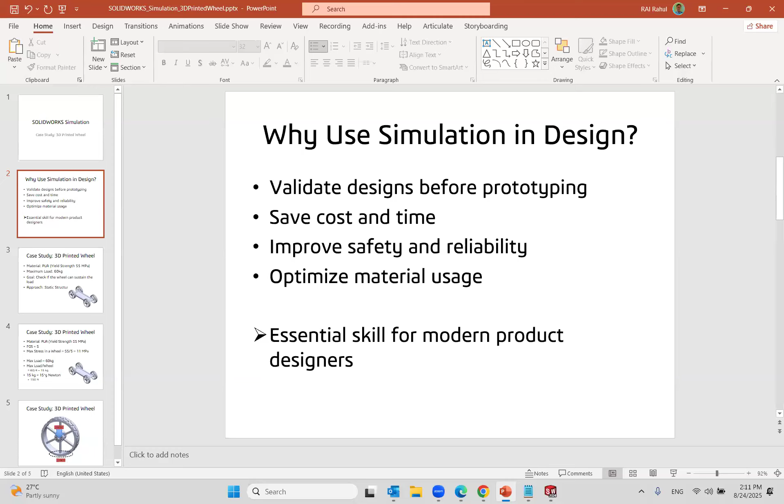So let's get started with this. Our case study will be of a 3D printed wheel. One of the common materials used for 3D printing is PLA, and its yield strength is 55 megapascal.

This is the key thing we need to verify in our design virtually: when we apply a load virtually on our 3D printed wheel, we make sure it does not exceed 55 megapascals. Because after yield strength, the product will fail and start to deform permanently. So we need to keep any stress induced in our virtual design less than 55 megapascals.

In simulation, we are going to simulate the real world, but we try to simplify it as much as possible, because if you simulate everything, like each molecule, the computational cost will be exponential. So we are not going too deep.

Our only working condition is that we are going to apply a 60 kg load vertically downward. In reality, there will be real factors—jerks, loads from other directions—but we are not considering those yet. For initial concept, we are just considering a maximum load of 60 kg downward.

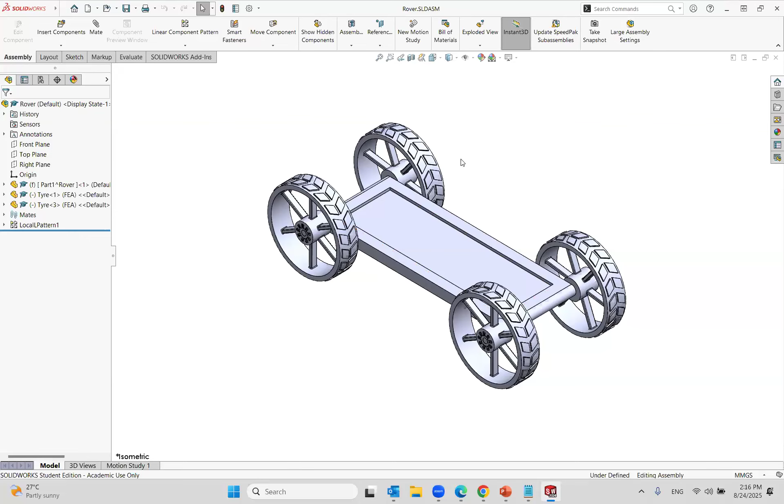So this is our assembly. As I mentioned, we are not going to simulate this whole assembly. We will just take one wheel and open this. So now this is our wheel.

There are too many things which are unnecessary for simulation, like these threads and engravings. We can remove these because for simulation, the stress generated at these points is not going to affect the performance of this wheel, so we will suppress these. This is our simplified geometry that we can use, and the stress generated in this part will give us an idea how our wheel is going to perform in real life.

So the first step is that any unnecessary decoration on your part, you need to simplify. Then you need to activate the SolidWorks simulation plugin.

For that, go to the options menu, and from there click on add-ins. Here you will have the SolidWorks simulation plugin. When you click this, it will activate in your present session. But if you want SolidWorks simulation to be active every time, you can activate this option so it always activates when you start up SolidWorks.

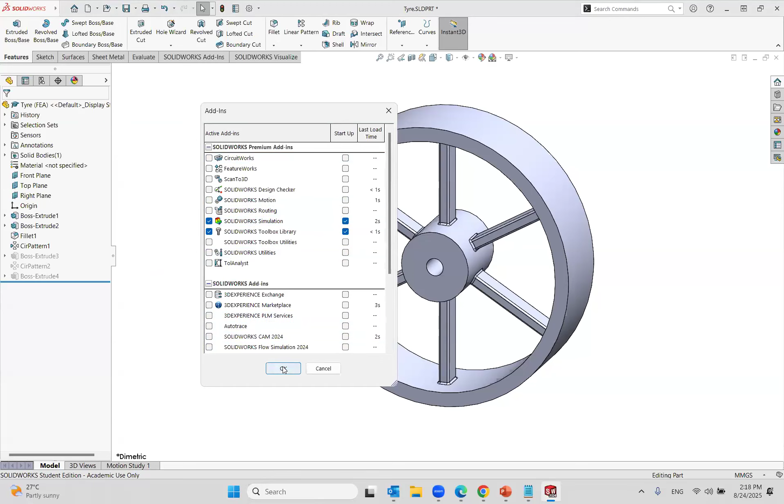When you click OK, you will see a new tab within a second. You can see this simulation tab. From the simulation tab, you now need to click on new study.

Here are a lot of options like thermal, buckling, fatigue, non-linear. First start with simple simulations like static simulation, and as you move forward in your design journey, you can perform other simulations also for buckling, fatigue, non-linear, drop test and others. For this webinar, I will just do a simple static study of the wheel.

Click OK and it will create a new tab of static study of wheel. So your 3D modeling tab is this model, and your simulation tab is static study of wheel.

Now we need to apply material to this wheel. As I mentioned, we will use PLA material. Go to your 3D model, right click on it, and there is an option for apply or edit material.

PLA material is here, but generally the PLA material is not available in the SolidWorks simulation material library. I will delete this and show you how you can create a new material in SolidWorks simulation. So create a custom library, or let's create a library in this.

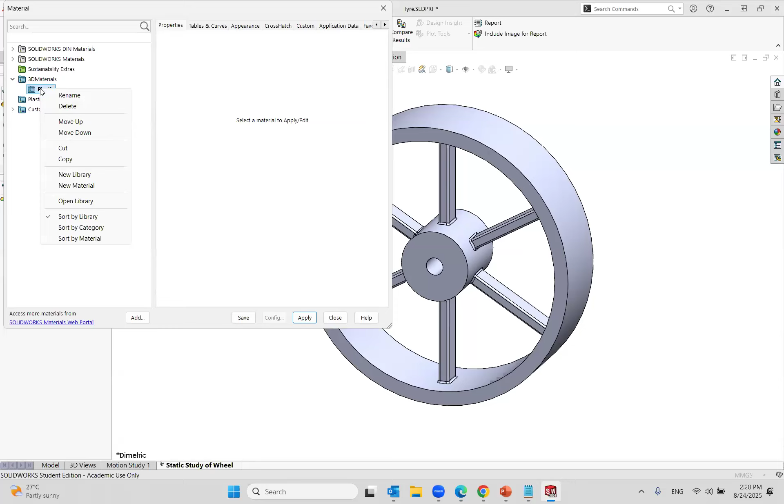In this one, now we will create a new material and name it PLA. From the website or wherever you are buying the PLA material, you can get these properties. The property for PLA is: its elastic modulus is 3500, its Poisson's ratio is 0.36, its mass density is 1250, its yield strength is 55, and its tensile strength is 60.

These red fields you must fill to perform any SolidWorks simulation, otherwise it will show an error. The blue ones are optional. Make sure you have all these four properties before applying the material. Now you have created the material, just click on apply, and you can see that this PLA material is applied to your part.

Now after applying the material, as I showed, we are going to fix the bottom part, but right now I will show you how you can fix something. You need to go to the fixture option, right click on it, and there is an option for fixed geometry. From this example animation, you can see how this fixed geometry is going to behave. There are other options too, for roller slider, and one for fixed hinge.

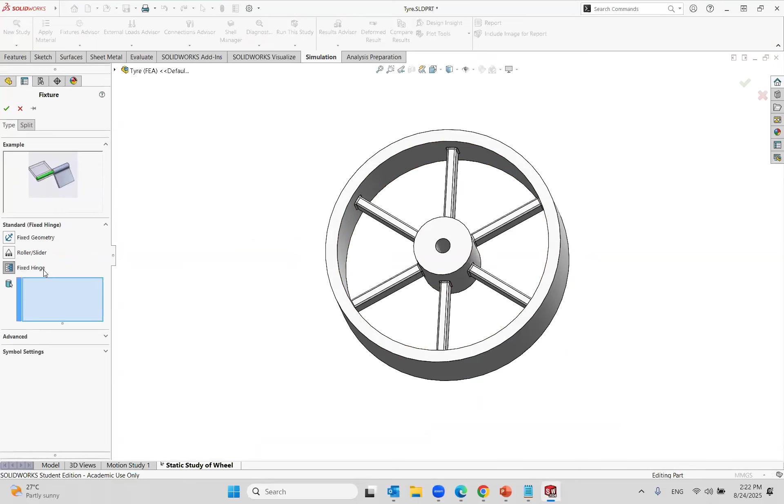But for now, we will use only the fixed geometry. Now I need to select a face. Right now it is fixing this complete outer surface of the wheel, but we do not want that - we want to just constrain the bottom part. So we need to split this outer surface so that we can apply a different boundary condition to a particular part. For that we need to go back to the model. I will simply create a sketch.

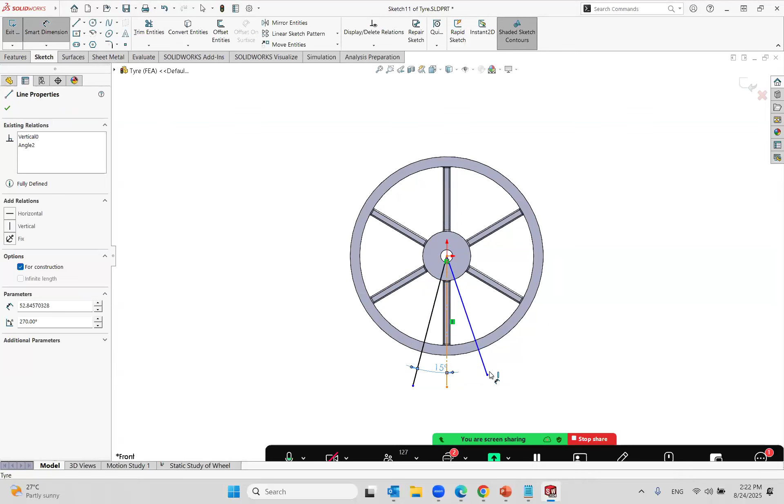I will make this as a construction line, and I will add dimensions to these lines. Now I will use these two lines to split the surface.

Go to Insert, from Curve select Split Line. This sketch is selected, if not you can select it from this flyout menu. Then for the surfaces, I will select this outer surface and click OK. Now you can see there are two partitions of the surface, this smaller one and this bigger one.

Now if we go to that static study of the wheel, go to the fixture option, select fixed geometry, and now select this bottom portion only. You can see these symbols demonstrate that this part is constrained. So now click OK. Now we have fixed the wheel, the bottom part of the wheel.

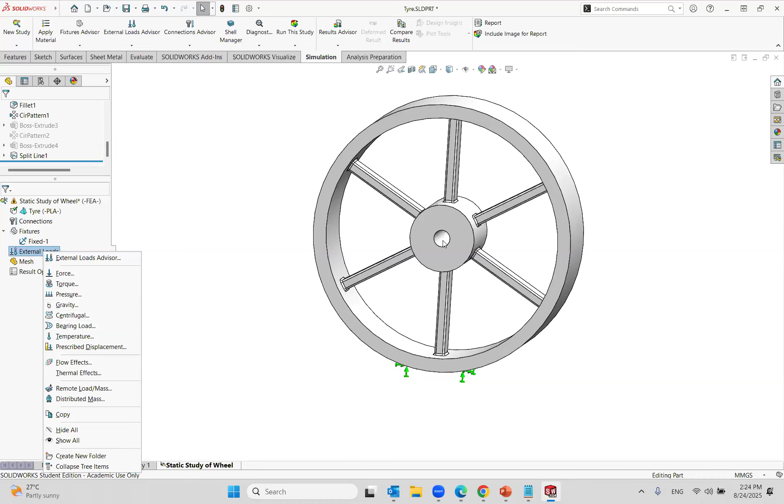Now we need to apply load to this board. We will use this external load options. There are force, torque, pressure, gravity, but for bearing loads, like here we are going to insert a metal pin or some other way to attach it to the rover, so bearing load is the perfect one for this condition. According to your application, your product, it will differ, but for this one, we need to apply this one.

But to apply the bearing load, first we need to create a coordinate system. As you can see, there is an option to select a coordinate system, so we will quickly create that. Go to the Feature option, from the Reference menu select Coordinate Systems. For the origin, we will select the part origin, and for XYZ we will keep it as default. Just click OK to create the coordinate system.

Now we can quickly apply the bearing load. For the surfaces, we will select this hole, and for coordinate system we will select the coordinate system we created. Now we will apply the load in the Y direction, so it will be 150 Newton. Let's click on the reverse direction.

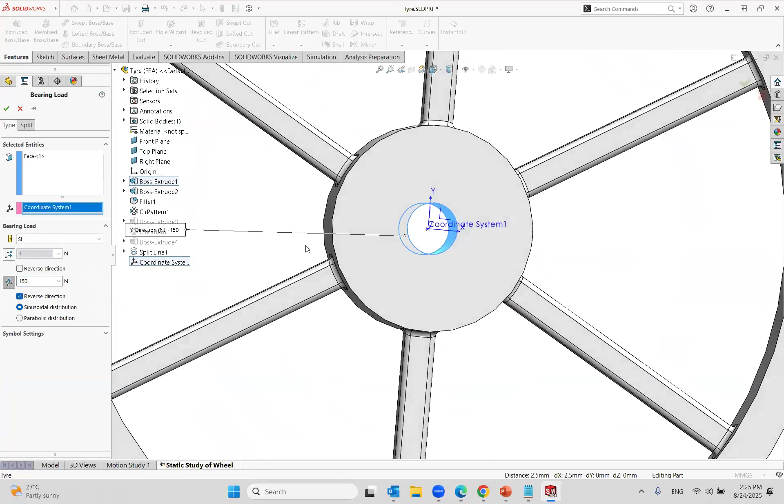And now click OK. So the difference between this bearing load and normal force is that in bearing load, it will have a sinusoidal distribution, which is more close to the real application.

So now we have applied a load, we have applied a boundary condition by fixing the bottom part, and we have also applied the material. So now comes the meshing.

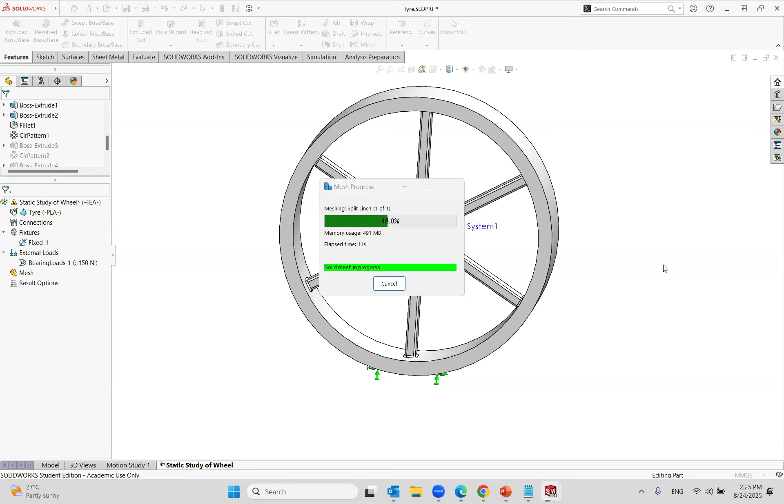So this mesh option, right click on it and just click on Create Mesh. We will use the default setting right now and just click OK. I'm using default setting so that I can show you live how it will create the mesh, and we are going to solve it live also. By using the default setting, it can be done quickly.

As you can see, the mesh is kind of refined at these joints, so we are going to use this mesh only. Suppose if you want to refine your mesh in a particular area, there are many options, there are mesh controls, so you can use those to create mesh at a particular area. I will share a learning path for SolidWorks simulation where you can learn that in depth. But for now, I think this mesh is quite fine.

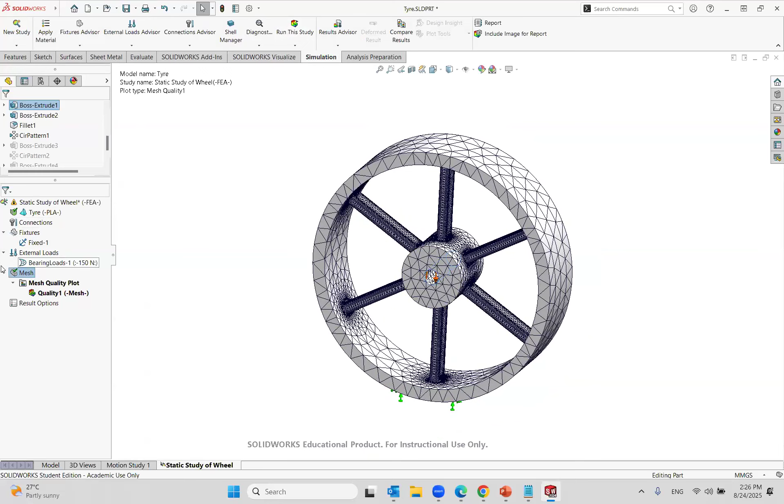So now let's run this study. After applying load, so first what we did, we applied the material, then we added boundary condition or fixtures, then we applied some load, then we meshed it. Now we can run the study.

So when you click on run this study, it will take some time and then it will start solving it. If your mesh is too refined, it can take longer time. Simulation is not just something you do once, you need to do it iteratively to understand how your model is performing.

So let's see. In the result section, we have stress, displacement, and strain. You can also get plots for other values, but for now let's just focus on stress. If we see the value, from this legend we can see that the maximum value is in Newton per meter square. So let's change it to megapascals. Right click on this and go to edit definition.

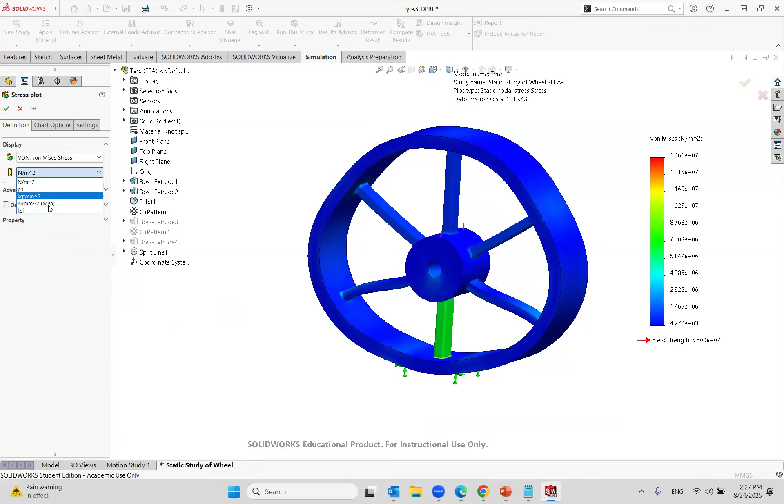And right now it is showing the deformed shape. Let's uncheck that, and instead of Newton per meter square, we will look at it in Newton per mm square, which is megapascals. And from the chart option, we can select to show the maximum value. Now let's click OK.

So here we can see that the maximum stress is almost 14.6 megapascals, and it is near this fillet section. And we want it to be less than 11 megapascal. So clearly 14 is more than 11.

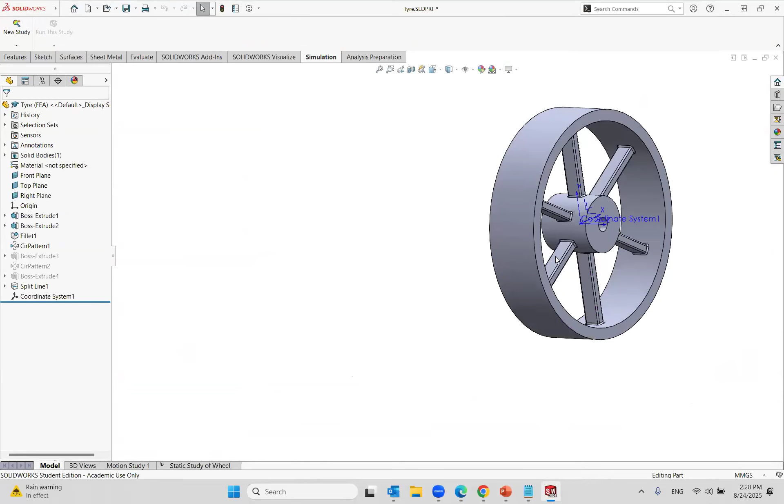So now we will do some design changes in this wheel, in this model tab, and then we will run the study again to see whether the design changes are reducing the stress or not. So we saw that the maximum stress was in the fillet section. Just click on the stress and then you can see.

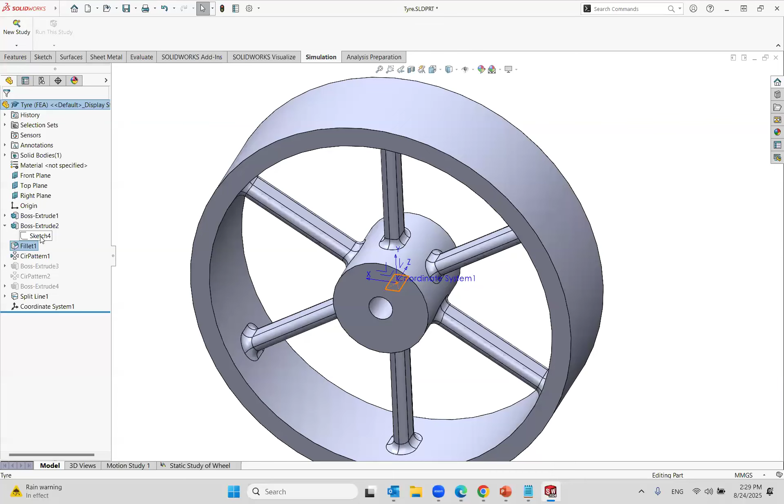So first, let's try to increase the fillet radius so that the stress concentration factor is removed. So we will make it 1.5, or let's just say 2... okay, so 1.5. And also let's increase the width of this spoke from 3 to 4.

We will rebuild this model, and now we just need to go to the static study and run it again. It will remesh the model and run the simulation study again, giving us new results. So earlier it created the mesh, and now the results.

So now the maximum stress is 8, which is less than 11. So with these changes, the maximum stress in the fillets is now around 8 megapascals, which is less than 11. So this is safe.

So now we can 3D print it and see how it is going to perform. And this is how you validate your product virtually.

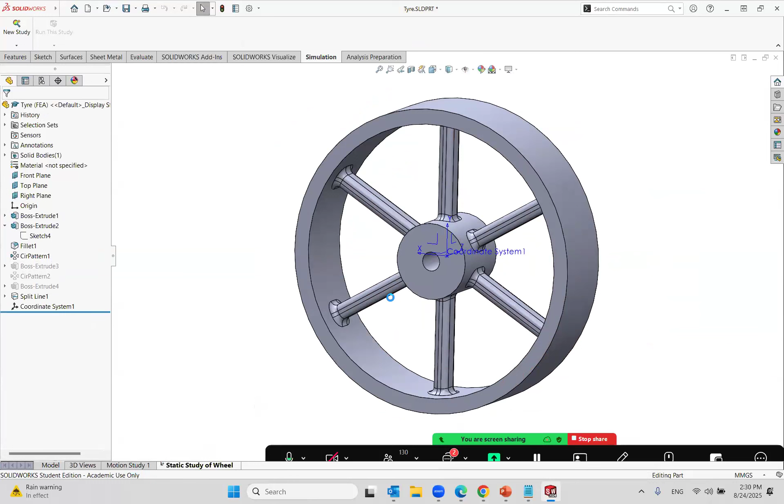So this is a simple demonstration, and this is the first iteration. One method I used was to increase the fillet radius. Other methods you can use include increasing the number of spokes, increasing the width or thickness of these spokes, or increasing the diameter of the rim.

By testing all of these variations, you can find out what design changes you need to make your product more stable or more lasting. So that was all from my side, and I will quickly share the link to the SolidWorks simulation learning path.

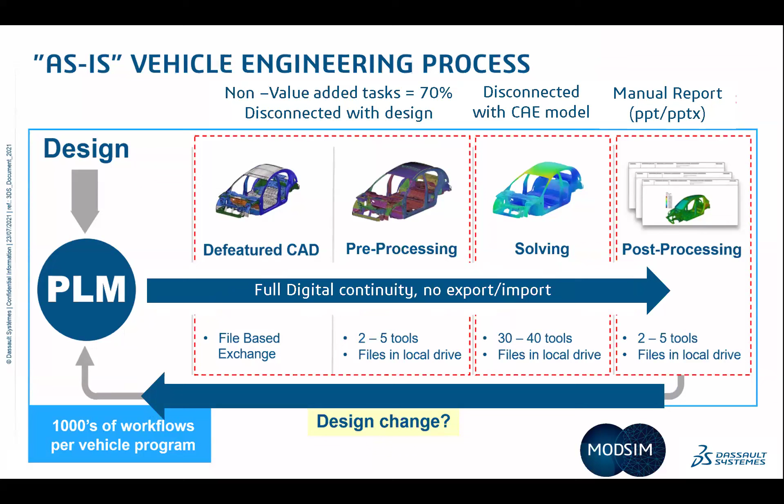All in all, the 3D Experience platform can help eliminate non-value added tasks like file storage, file transfers, and compatibility tests, and rather helps you focus on the more important parts of the design process.

Now let's get a simple introduction to the finite element method. In all disciplines of science and engineering, the focus is on determining what will happen when a physical system of interest, like a building, a bridge, or an aircraft, even a collection of molecules or a living organism, is subjected to effects of the environment, which may lead to a response from the system, or physical processes of systems of matter, or changes that happen to a piece of matter that we isolate, due to interaction of that piece with its surroundings, or any physical process that can be described mathematically, meaning we can formulate mathematical expressions describing the process and allowing us to determine how it takes place in space and time.

So FEA works by dividing the object into smaller, simpler pieces depending on the object's geometry. Finite element is basically dividing a big part into smaller chunks. These elements can be triangles, squares, or any other shape depending on the object's geometry. By breaking down the complex object into smaller pieces, it becomes easier to analyze the behavior of each piece and how they interact with each other.

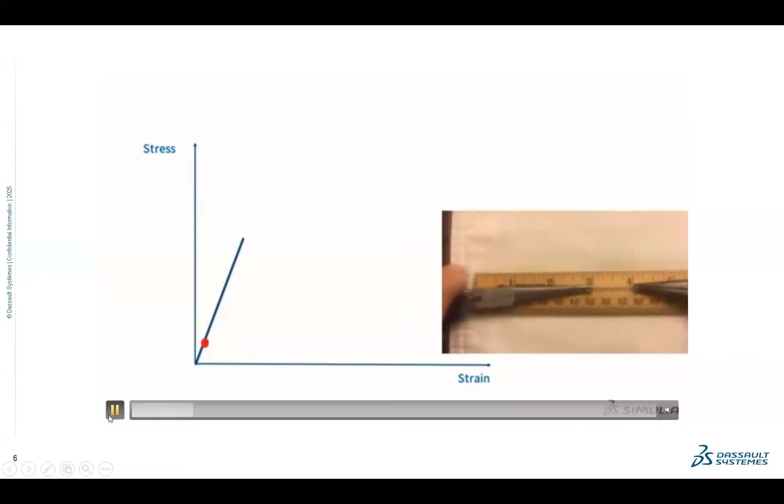Okay, now to understand the behavior of metallic components under load, let's understand the concept of a metal under load. So here you can see a spring.

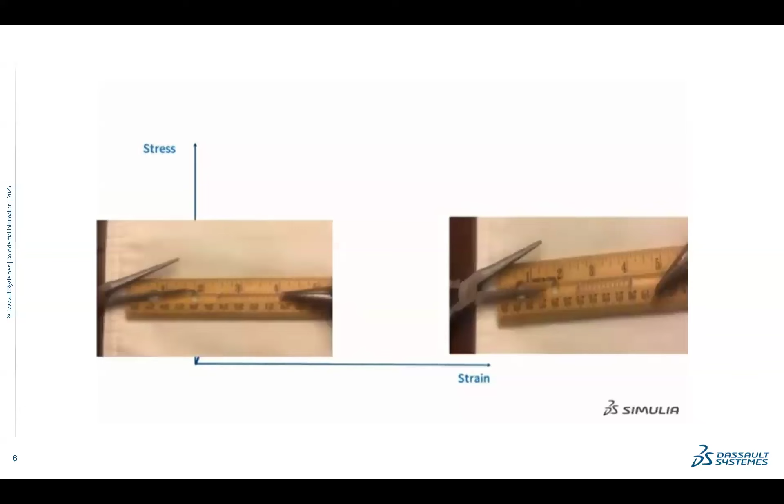When the spring is pulled within the yield point, the stress and strain return to zero as the spring takes back its original shape once the load is released. When the load is continuously applied like so, the relationship between stress and strain stops being linear, and when the load is released, the strain remains constant while the stress becomes zero. This is what Rahul discussed earlier - this is called plasticity. You apply the load, and after a certain point, the spring doesn't actually return to its original shape. These are called plastic deformations.

Okay, so now let us review a very basic ModSim workflow. We'll dive into the 3D Experience platform's native app of CATIA Part Design.

Shubham, is there a way you can stop the interactions right now? Because I'm constantly getting messages of hands being raised, so I'm getting a pop-up on my screen. Is there a way you can stop that? For hands being raised, no, Deba, I think it will be coming automatically. Okay, yeah, okay.

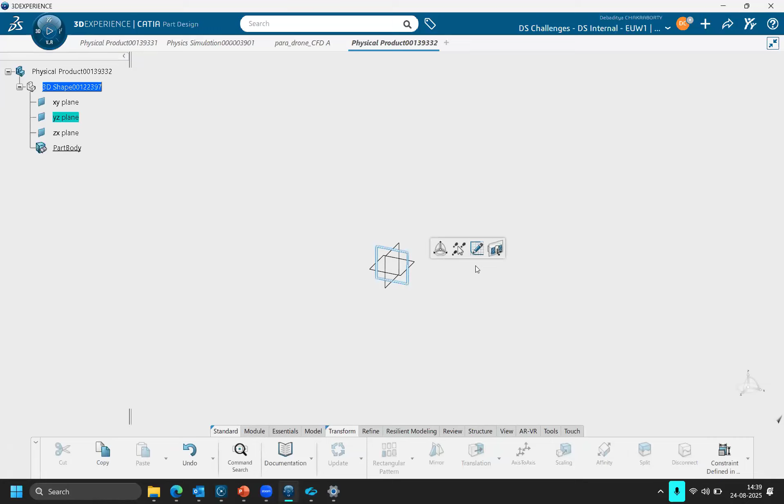Okay, so I think most of you would be familiar with the 3D Experience platform if you've attended all the webinars by now. So let's get started with a simple sketch. We'll simulate a basic cantilever beam here. I'll select a plane and start sketching, and make a centered rectangle, maybe 100 by 100.

Okay, so now we have some new functionalities that you can see. You can either constrain it yourself, like so. And I can see that my sketch is not fully defined, and I can be lazy and just let AI handle it for me - generative constraints. As you can see, in a snap of a finger, you can convert your sketch into a fully defined state. And I can use these constraints as parameters if I want to go for maybe a design of experiments, which we'll discuss later.

As Rahul mentioned earlier, any design process is iterative. If you want to automate the iterative design process with predefined algorithms, there is an option on the 3D Experience platform now within Physics Results Explorer, where you can set up experiments, design of experiments with classical processes like Latin hypercube methods for varying your variables, or maybe you can even go for machine learning based methods. We can discuss them later, but for now let's keep it simple.

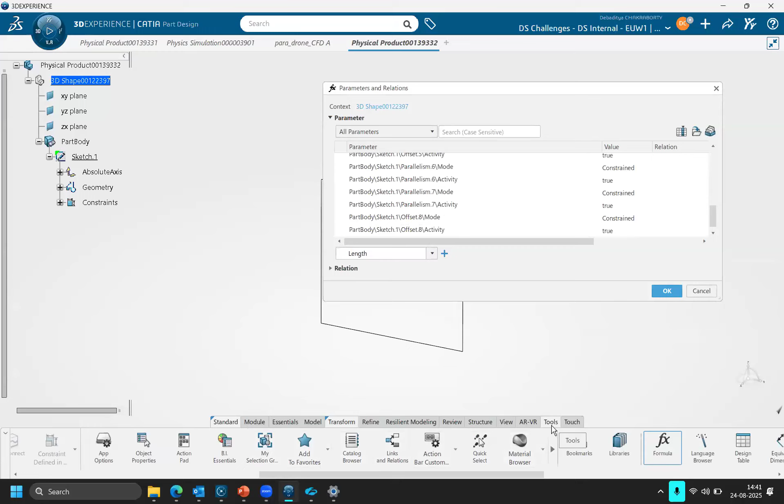I'll exit the app and start giving out the formula or the parameters. So here I'll start by first creating a parameter. From the action bar, I go to the tools tab and click on formula, click on plus, double click, and change the name. I'll just keep it as length for now.

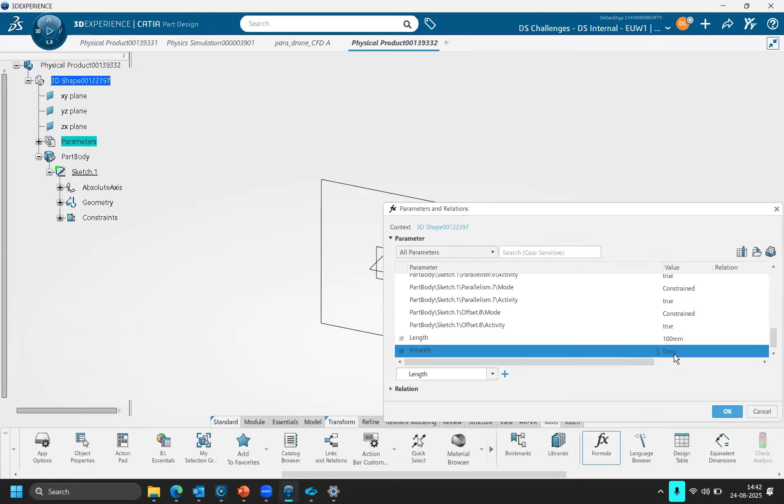Since I don't want to snap it back to 0, I'll just put 100 so that I can define, or give the details of this parameter to the constraints that we defined earlier. I click OK. Similarly, I can create another parameter called breadth.

Okay, so now at this point, what I'll do is I'll click on formula again, and now I'll assign these parameters to the constraints that we created. I just clicked on the sketch, and you'll see that all the constraints popped up. So I'll click on one of these constraints, the length.

Now I'll click on the three dots to edit the formula, and from the feature tree, I'll expand parameters. I'll double click. Okay, so I see we have one relation that has been created.

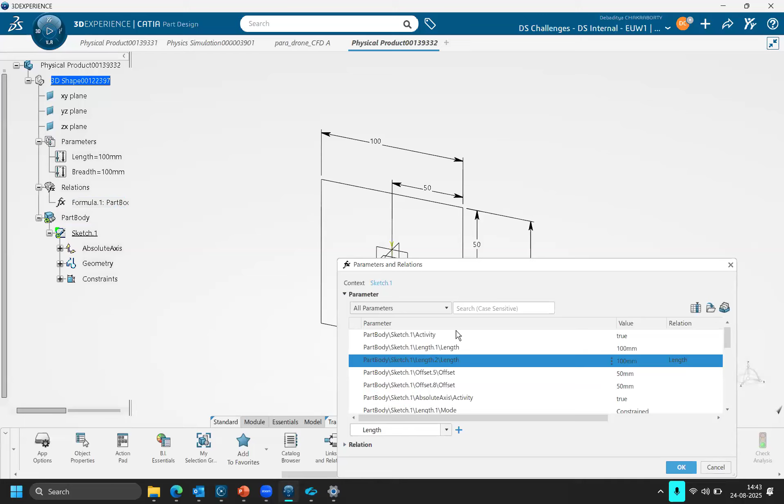Similarly, I'll do the same for breadth. Three dots, edit formula, breadth, double click. Okay, so now if I go back into the sketch, you will see an f of x kind of symbol right next to the constraint. That means these constraints have relations that can be manipulated right from the feature tree.

Okay, so now let's extrude this, or pad this, maybe 1000, looks fine. Now I'll change the parameters and check if the parameters are working. Looks like they are, so we're good to go for this simulation.

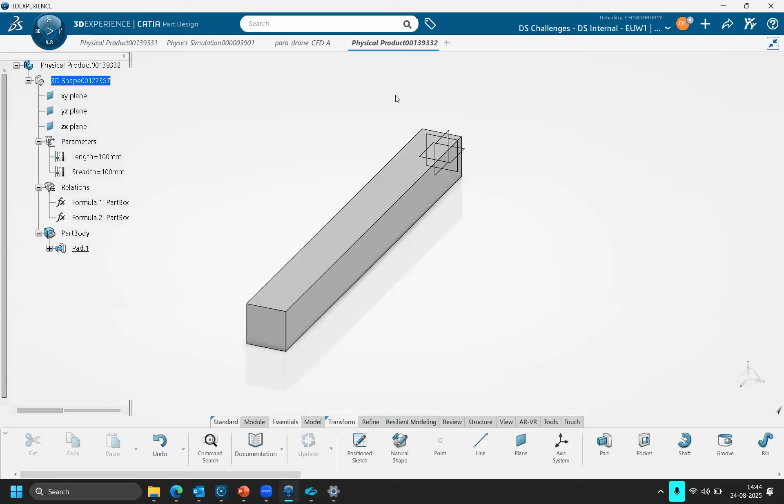Now at this point, you need to determine what kind of simulation you want to do. In the 3D Experience platform, the best part is you can access all the features of Abaqus, an industry-leading FEA software used by all the top companies in aerospace and defense, transportation and mobility, and high tech. You get all the features of Abaqus, which is mostly a developer-focused FEA software, into a very user-friendly GUI here on the 3D Experience platform, and you get the same results you'd get on Abaqus CAE right here with a much friendlier user interface.

So I'll just name it cantilever. I'll put the analysis type as structural. We don't have a finite element model yet, so we can't select anything. And I click OK.

Now, the best part about the 3D Experience platform is that you have an assistant. You also have a simulation wizard on SolidWorks that functions similar to the assistant. If you just keep following the assistant here, you can be guided through the full setup of your simulation, or the pre-processing, as we call it in the industry.

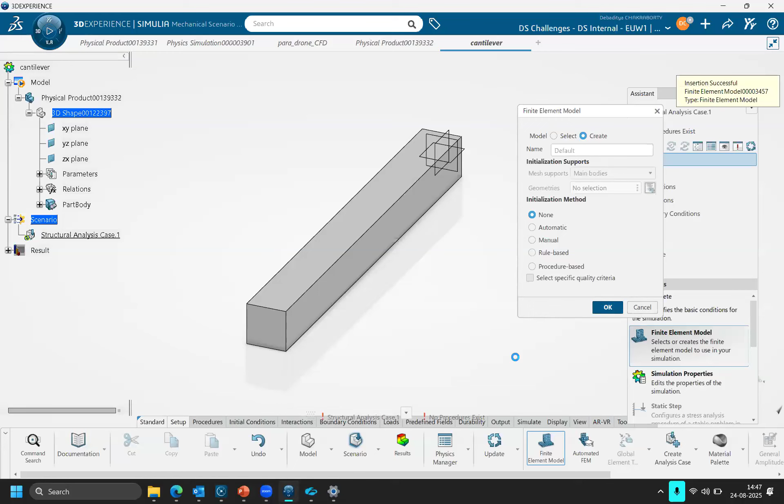Okay, so I see a FEM module has been added to my product structure tree. Next, I'll go to the mesh tab and search for the kind of mesh I want. I want a hex mesh, so either you can go for a sweep 3D mesh, or you can go for a hex-dominant mesh.

So for the support, I'll select this geometry. Now I kind of know what the dimensions of my beam are, so according to it, I can refine the size of the mesh.

The smaller the size of your elements are, the more time it takes for computation, because we are solving partial differential equations here, and they don't converge to zero, so it takes a lot of time to solve. I won't get into the mathematical part of it.

I just want all of you beginners to get a flavor of ModSim, of how you can leverage ModSim and basically sweep through your workflows quickly. So for maximum size, maybe we can keep 50.

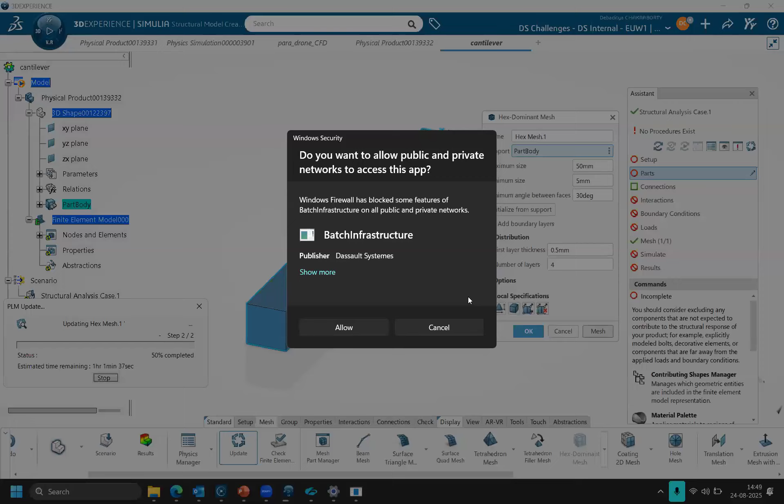Minimum size is 5. I don't think this 5 will influence anything here because it has a square geometry, so it shouldn't be a big deal, because we also don't have complex contours in our geometry that can influence the size of the mesh or the elements that have been taken.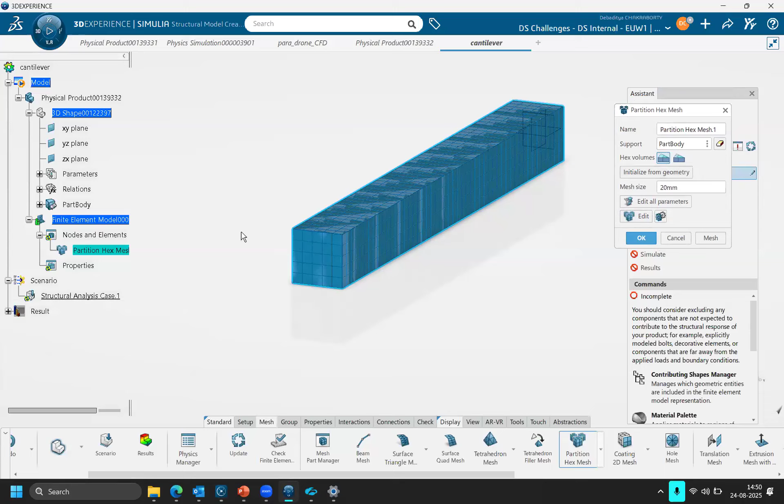So I see that we have a really coarse mesh here. You can go ahead and even change the size of the mesh. So maybe if I put 20 here, and I know that the dimensions I took are multiples of 20, we can get a very nice clean mesh here.

Next, whenever you are working with simulation, the finite element models or FE related apps, you need to make sure that you have a basic understanding of how Abaqus simulations work. That will come in really handy if you want real world correlations.

And like in Abaqus, you need to give it a section property. So here we have a solid section. I'll either click on the geometry here, or maybe I can click on the mesh as well.

Now I will assign the material. We have some predefined materials that are standardized, so if I go to DS Standard, click on the dropdown here, and click on DVI Steel, click OK.

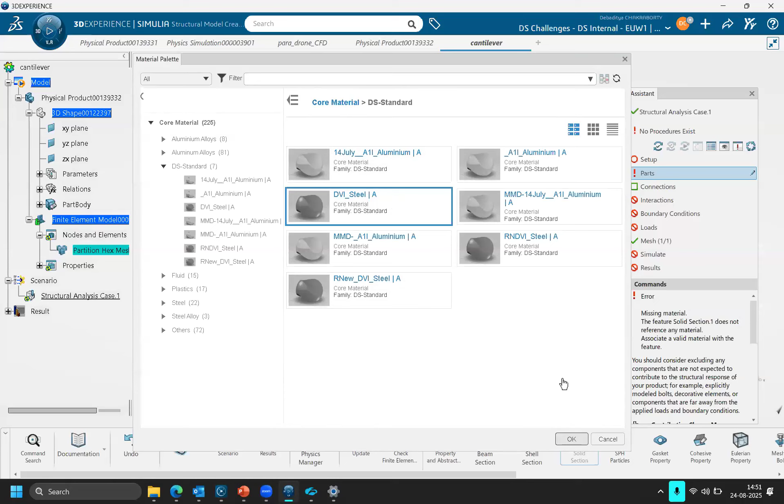Now we have this dropdown that makes us select the behavior of the material. Here we are doing a structural simulation, so we need an elastic plastic behavior. So I click on OK.

As I can see in the assistant, I think we are good to go into the scenario tab now. The scenario tab is where you'll actually start by defining what kind of procedure you want. Here you can see you have a whole array of procedures - the static step, you can get a little introduction of what this step actually is.

So like we did earlier, the static step will actually consider the plastic behavior of the material, and you can also solve it using static perturbation step, which keeps the model linear, so it won't give you plastic deformations. So with static step you can actually calculate for plastic deformations, but static step is computationally more expensive than static perturbation step.

Then you also have implicit and explicit dynamics. Implicit dynamics are used for low speed events, kind of like when you do quasi-static analysis of rubber gaskets, or high strain bearing products - like rubber gaskets or rubber mounts, or something that deforms in all the axes when any force is applied on them.

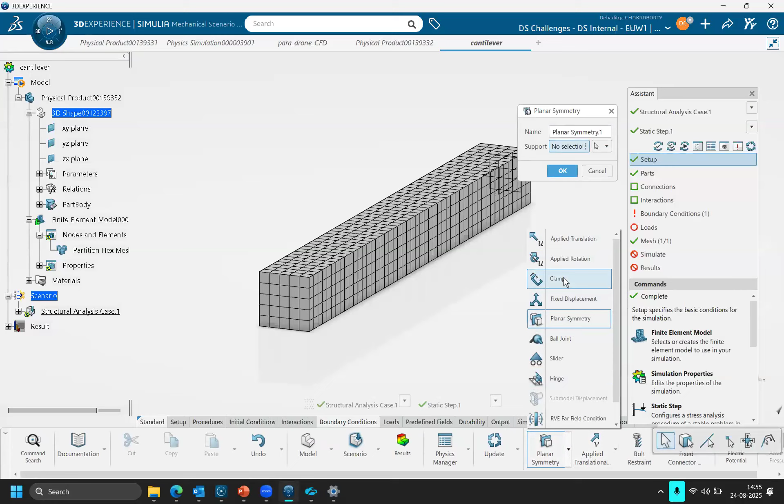Next, I'll go to boundary conditions. Here you can either go for fixed displacement, or you can also go for a clamp. I want to keep everything simple today, so I'll just use a clamp on the rear face of the cantilever beam. Click on OK. So when I select clamp, it means that all the degrees of freedom have been locked for this face.

So now I'll rotate it back again and go to loads. I can again click here on the assistant, and it will give me all the frequently used forces, or loads.

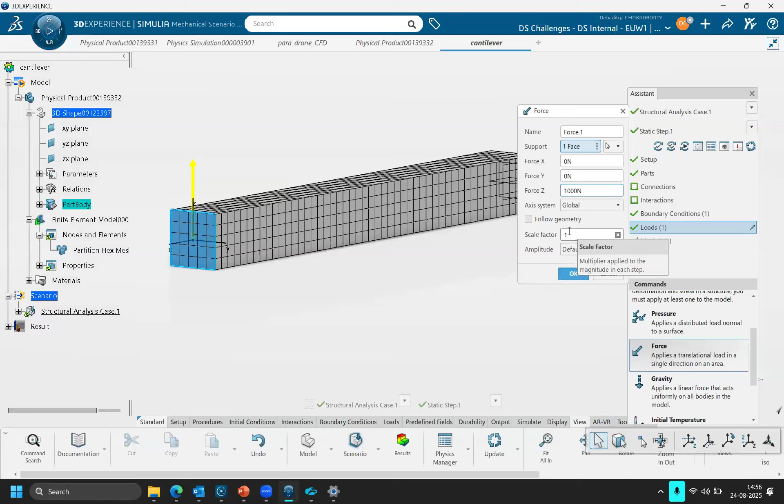So I'll just put a force here, maybe through the z-axis, 1000 Newton. I see that the direction is not where I want it to be, so I'll put it in the opposite one and click OK.

And I see that the system is saying that we are ready for simulation. So I click on simulate from either here, or maybe, before we hit simulate, I think it's a good opportunity for us to introduce outputs.

By default, when you're setting up a simulation based on the loads and on the conditions, there are some standardized output requests that are made ready for you. So it covers the most information that a basic simulation needs, or can output.

But if you want to go into the nitty gritty and maybe get total plastic strains and a maximum equivalent plastic strain, I can create special output requests and rename them to, maybe, P underscore strain. Click on OK. And here you'll see a drop down called output group.

So what are field and what are history output? This is again a very Abaqus solver based question. So what is a field output request?

Think of a field output request as taking a detailed photograph of your entire model, or a significant portion of it, at specific moments in time. Specific moment in time is the emphasis of this statement, and it captures the spatial distribution of a variable across a wide area.

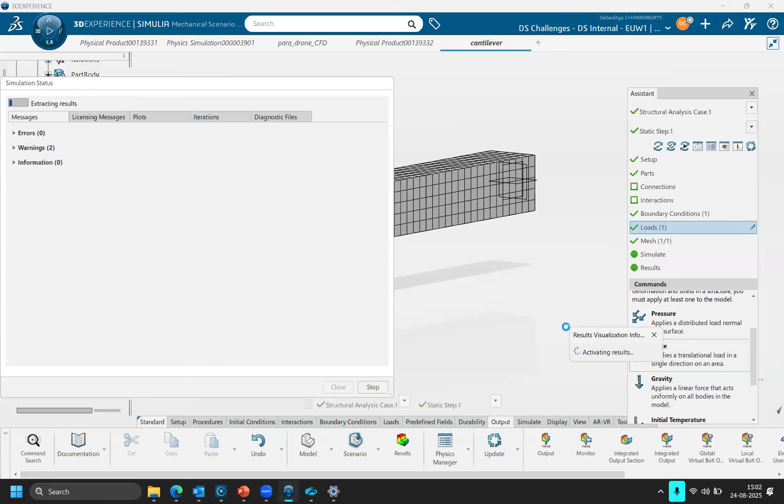All right, so now we get right into the Physics Results Explorer. This is where we'll post process our simulation. So we first get greeted by this dialog box.

Now here you'll see a drop down, first step. In this analysis case, we only have one step, so we need not bother with this. Rather, we should explore what all contour plots we got.

So first, let's go for deformation. Deformation was so small it didn't actually yield anything. So rather, we should actually go for displacement. So displacement, as you can see, is 0.195.

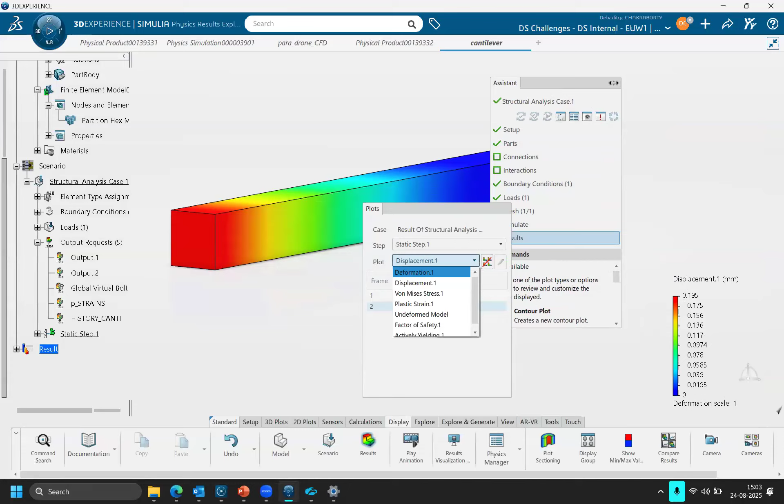Next one is stress, and I think the plastic strain that we requested earlier. Again, the deformation, the strains are so less that we don't even get into the realm of plastic deformations. Rather, we should also go to factor of safety, which is way over 2. So the plot looks like this. If it were failing, then definitely you would have gotten a color that would be in this spectrum or this legend, and nothing's actually actively yielding. So yeah, we need not bother this.

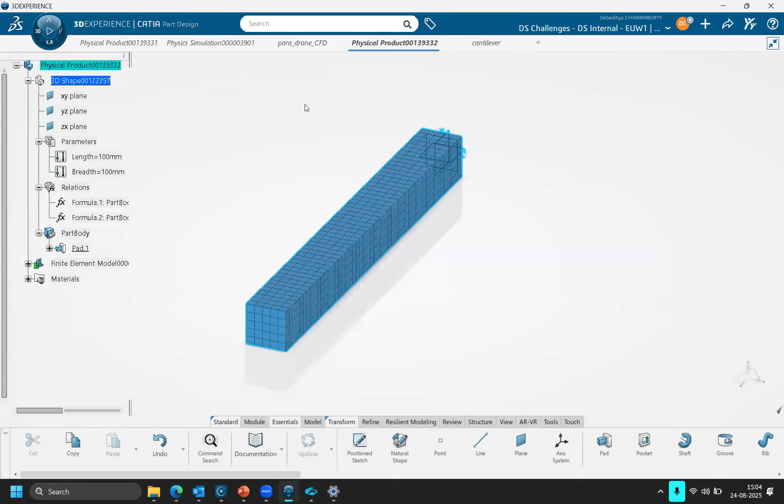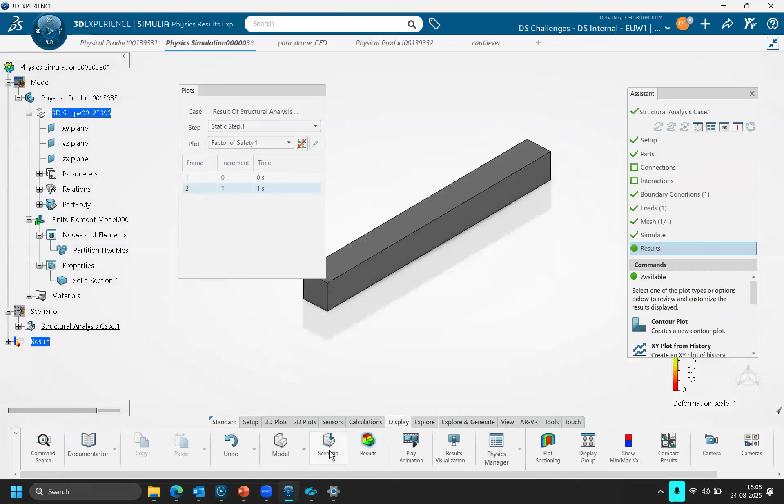And I'll go back here, this scenario. As you can see, the model has already updated with our new dimensions. But the results aren't.

Okay, so let's update this. So my bad, I opened a different tab. So I just updated it, and you can see that the model is now updated with the new parameters, or the changed parameters, I should say. And now maybe I'll summon the assistant. As you can see, we already have the CATIA update logo near the results. That means the results are not up to date and we need to solve again.

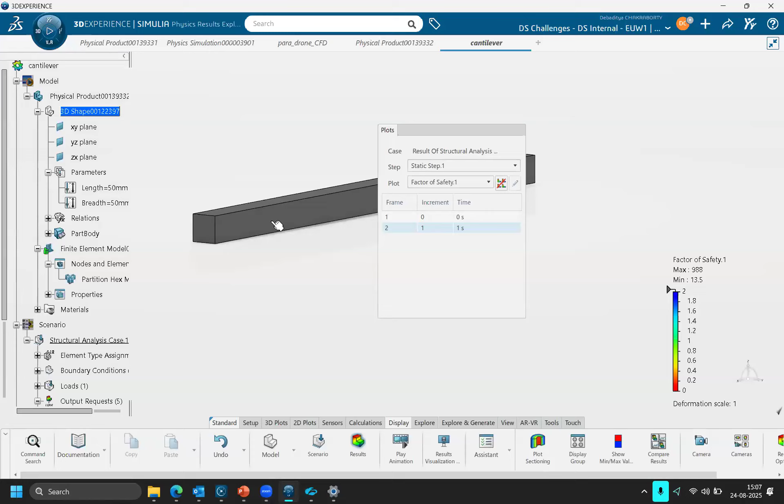And I think we are still way off from actually getting this beam to yield. But again, you can now notice that the displacement has increased a lot. You can say the same for the von Mises stresses. And we didn't enter the realm of plastic strains for this model. But if I increase the force exponentially, then definitely it's going to yield.

So now you can also go ahead and view different contour plots and play the animation like so. And again, the scale has been set to 1, so it is actually deforming exactly like it would in real life. But again, you can play around with it.

And this completes our Modsim loop. So we saw that our model has a factor of safety that is way beyond what we require. So we shrunk the model, we changed the dimensions using parameters, and we solved it again with just a few clicks. I didn't have to set up the model again from scratch. So with a few clicks and a few updates, we could get our new model all set up and running. So this is basically the essence of Modsim.

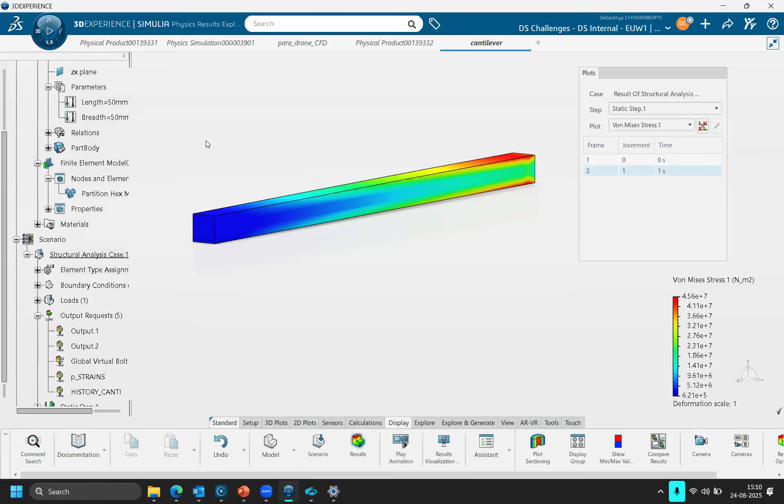Now we discussed a structural simulation example. Now let's get into a CFD simulation or a CFD application, and that is also in the same app, so you don't have to jump around in different apps. Let me just close all the tabs that I won't be needing from this point. Okay, so now setting up a CFD simulation takes time, but again, guess what? 3DExperience platform has such easy to understand workflows and such an easy to understand graphical user interface that you can get up and running with CFD simulations really quickly.

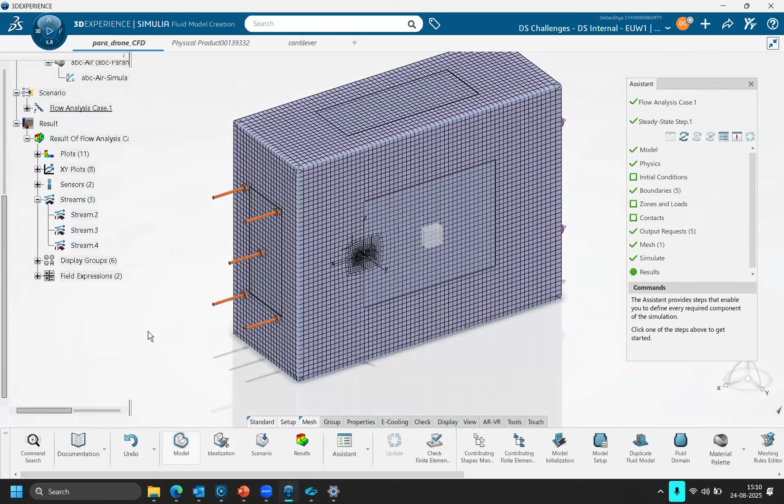Okay, so let us get started with one. So here, as you can see that we have a drone here. Okay, so I'll hide it and do a bit of visualization. Yeah, so we have a drone here. So I'll quickly tell you what all we are going to simulate this drone's aerodynamics for, what all KPIs we can use to evaluate the performance of this drone at cruising speed.

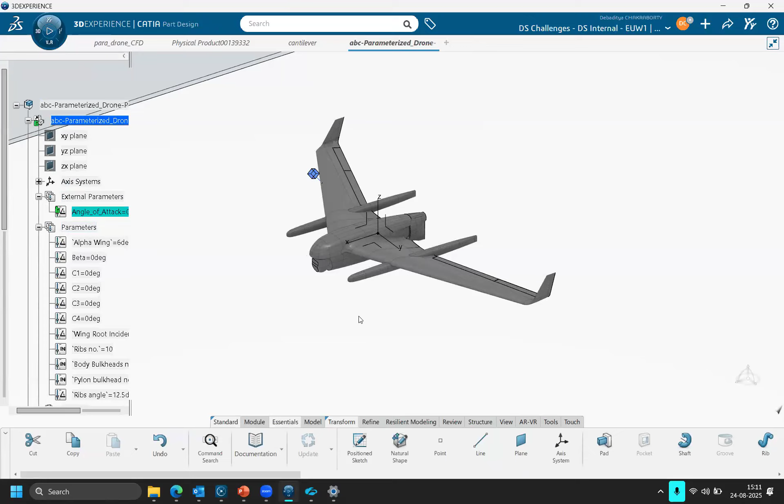So now as you can see that even the orientation of this drone can be parameterized. So the angle of attack here can be used as a parameter. So right now it's 0. But if I go to assembly design and change the angle of attack, you can actually calculate for ascent, descent, and cruise.

Now let's just head back to the PPT. Here you can see the basic workflow that we are going to use. We start with geometry idealization. We won't be discussing geometry idealization because again, it will take a lot of time and the whole workflow is available in the documentation. So if you want to get deep into it, I'll share a link at the end of the webinar.

Then we'll head on to fluid scenario creation, where we'll pre-process the simulation and then define the physics domains, apply the boundary conditions, customize the mesh, request measurements, the output requests basically, and we can preview the mesh. Again, this step is optional. And we run the simulation and post-process in Physics Results Explorer.

So the model used in this example represents a UAV, simplified to a drone. You can also call it a drone. You'll evaluate the aerodynamic performance of the drone model at the conceptual design stage.

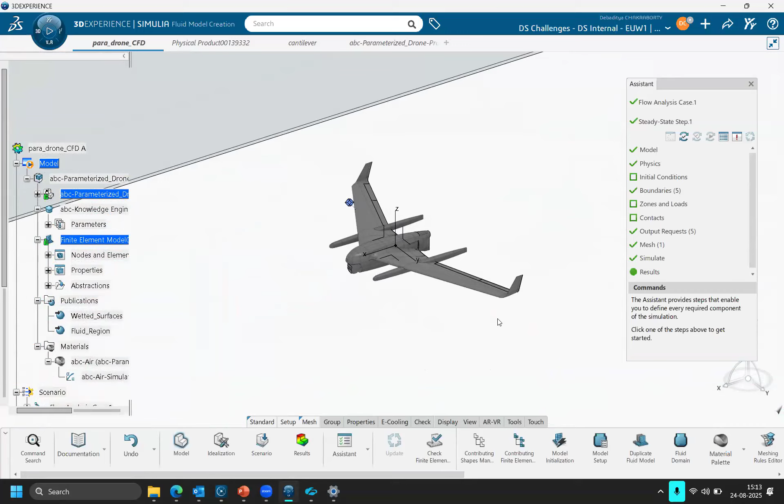We're not getting into full lattice Boltzmann based simulation. We are only going to use Navier-Stokes based solvers here, and a steady state incompressible fluid flow simulation will be performed to represent the drone flying at cruising condition.

So we'll first import a model into the 3D Experience platform. We'll create an exterior flow fluid domain, which can also be described as an abstraction shape. We'll configure a steady state fluid flow analysis, define boundary conditions required for the CFD simulation, mesh the fluid domain with a hex dominant boundary layer mesh, and also post-process the results.

The boundary conditions used in this simulation will be a velocity inlet equal to 25 meters per second, and a pressure outlet sufficiently downstream of the drone at atmospheric pressure. A steady state procedure will be defined. The Reynolds number is approximately 8 times 10 to the power 5, indicating turbulent flow.

Since the drone and the incoming flow are symmetrical about the XZ plane passing through the center line of the fuselage - the fuselage being the main body of the drone, not the wings, just this body, this is the fuselage - the drone and incoming flow are symmetrical about the XZ plane, as you can see here.

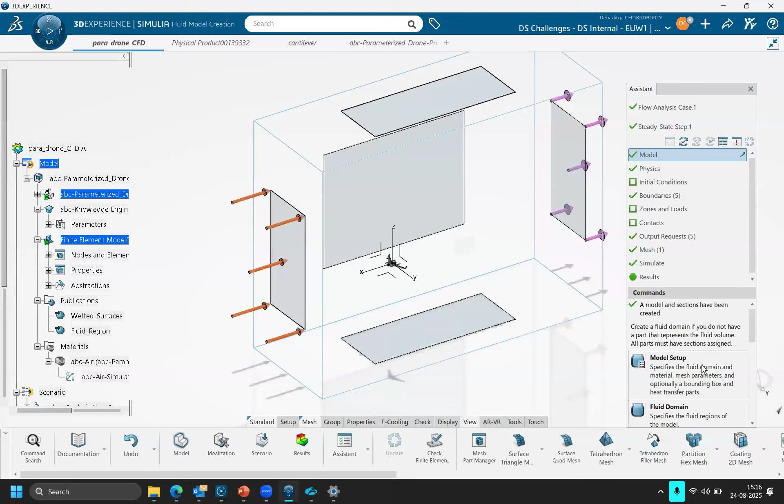The best part about using CFD in the 3D Experience platform is that you can just follow the assistant steps one by one. So let's say I start by clicking on model, the first thing you see is model setup. Here you see all the drop downs, and you can go through them and keep specifying what you want.

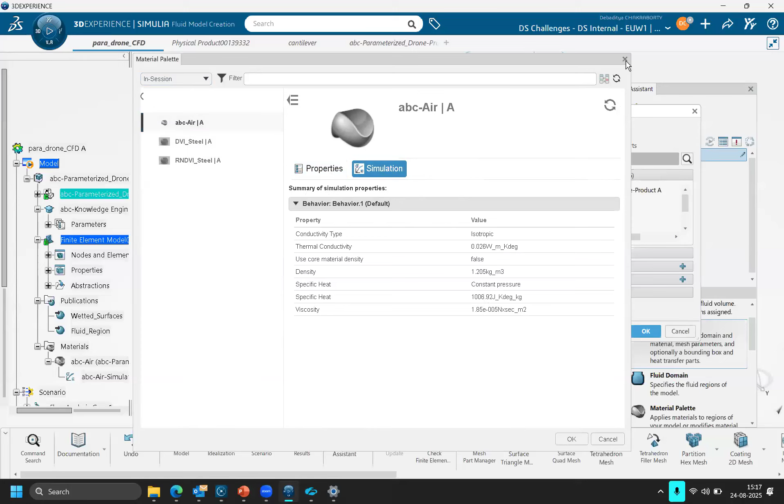Next step is you're going to define what bodies or geometries are being involved in this simulation. As you can see, it has already been defined here.

Next comes the bounding box. You can either eyeball it by pulling and pushing these glyphs, or if you have some hand calculations ready, you can create the bounding box accordingly.

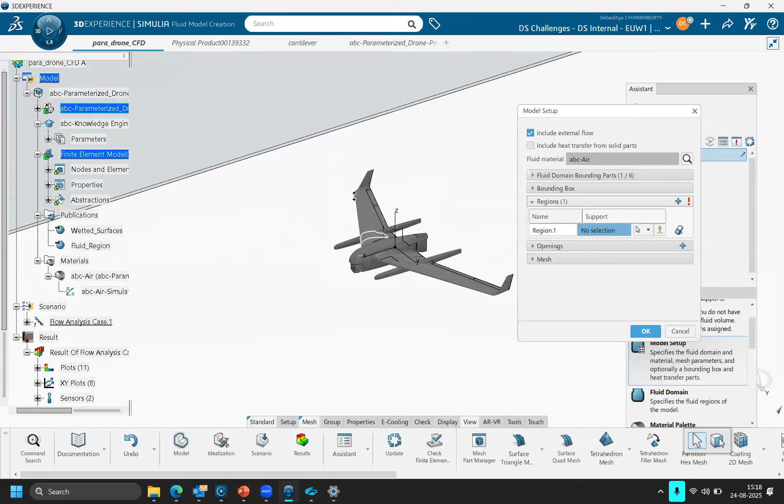Next, you need to give a reference fluid region. The designer already gave me a publication of the wetting region that we have. Since the fluid is being flown through only the half model, we only select the leading edge of this wing as the region that will come in contact with the flow. Most importantly, we'll be able to see whatever fluid is flowing over this geometry - we'll discuss later how. So I'm going to just select this.

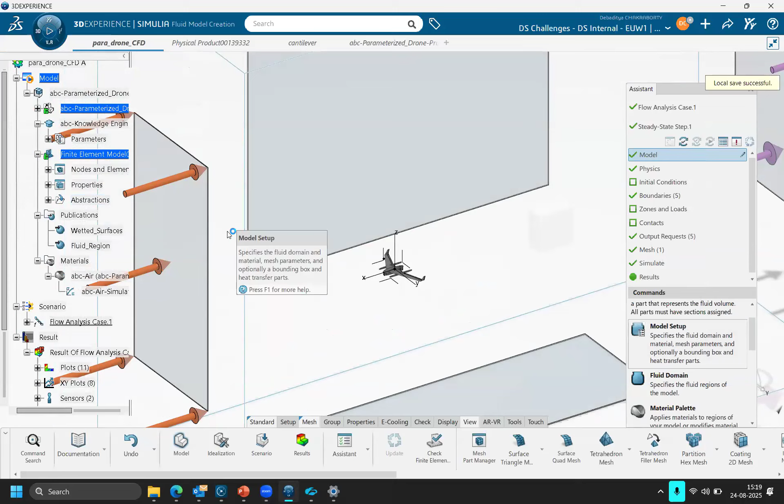If you want to initialize a simulation here - CFD simulation takes a lot of time to converge, so I already have one ready for you all solved, and we'll be using that. But before that, let's learn how you can import a model.

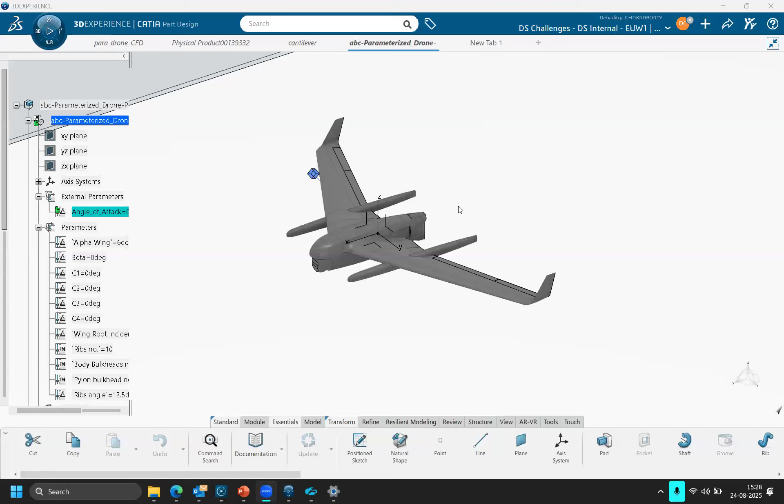Okay, so I think we discussed model setup. Here you'll see a whole host of options. You can go ahead and read the documentation. There's a little description here about what sections you may need to use within the fluid domain in order to get the most accurate results.

Next step is to define the physics model. You can click on physics behavior. You should rather go from the first step. Here you can see that we name the step as fluid, and we give the viscous regime as turbulent.

Now here comes the research part of it. You need to understand what kind of turbulence model will suit your simulation. Here we are using steady state K omega. If you have highly compressible situations, like analyzing a turbocharger or working with heat transfers, then realizable K epsilon will suit your simulation. Because we are doing a basic Navier-Stokes based simulation, we are going to go with the steady state K omega model.

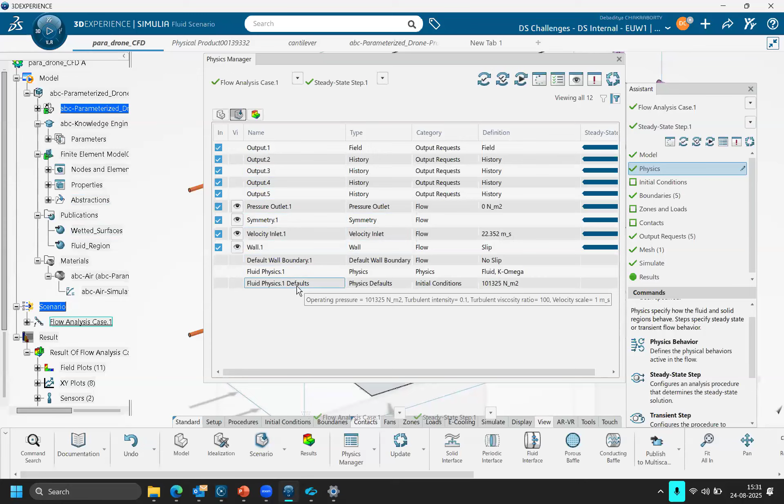Next, from here, you can also select and configure the default settings that you'll have. So the operating pressure, the reference altitude. You don't really need an altitude in this kind of situation. Then you can go for intensity, viscosity ratio for the turbulence specification. These values are more or less default - turbulence intensity, viscosity ratio and velocity scale are all default settings.

Then I think another important concept here is to define the walls. So we are giving the walls some slip. You can also enable wall roughness, but again, it depends on your model if you want to enable slip or not.

So let's discuss why you will need wall slip. Basically, when you have a no slip condition, the fluid is flowing through a pipe, maybe. The no slip condition dictates that the layer of fluid molecules immediately adjacent to the pipe wall is stationary. This creates a velocity gradient where the fluid velocity increases as you move away from the wall towards the center of the pipe. This is a default assumption in the vast majority of CFD simulations for macroscopic flows. If you have wall slip in certain scenarios, this no slip assumption breaks down. The fluid at the wall is not stationary, but instead has finite velocity, also known as slip velocity. This means the fluid effectively slips along the solid boundary. I think the name pretty much sums it all up.

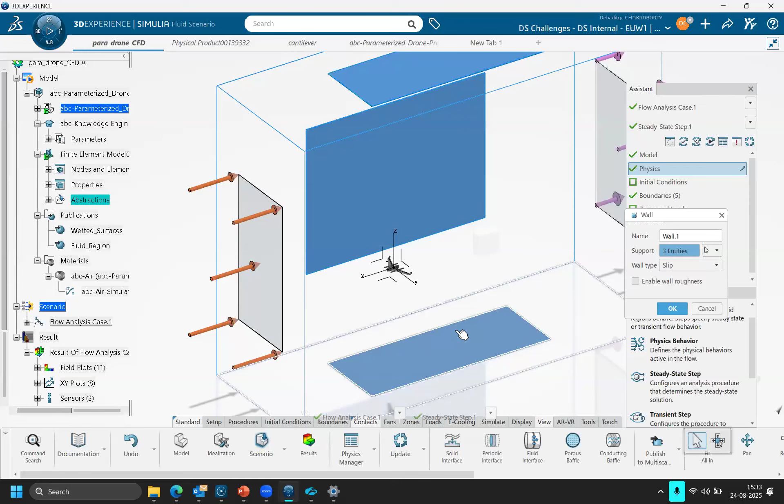Now let's go back to the Physics Manager. I think it's a good time to discuss the output request that you would need.

So this is the default output request that you'll get. Again, we are not calculating for electromagnetics. This output request is created automatically, and we can go ahead and uncheck these. The important ones are, of course, turbulence based - turbulence viscosity ratio or turbulence specific energy dissipation rate. You can also have eddy viscosity, or kinetic energy, and this will be default if you are selecting a field output group.

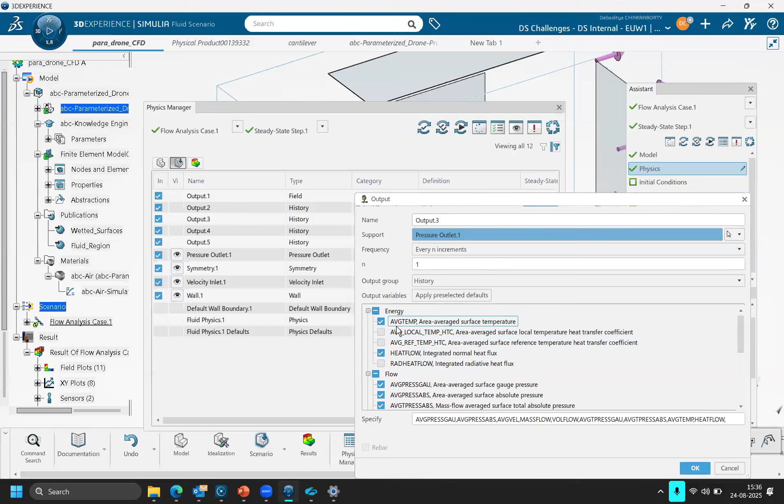So I created a different output request just for the fluid force that would be acting on the model. I have already pre-solved this model because it might take some time for it to converge. Meanwhile, we can explore the post-processing capabilities or whatever we requested. Let's see what all outputs we got out of the pre-processing that we did earlier.

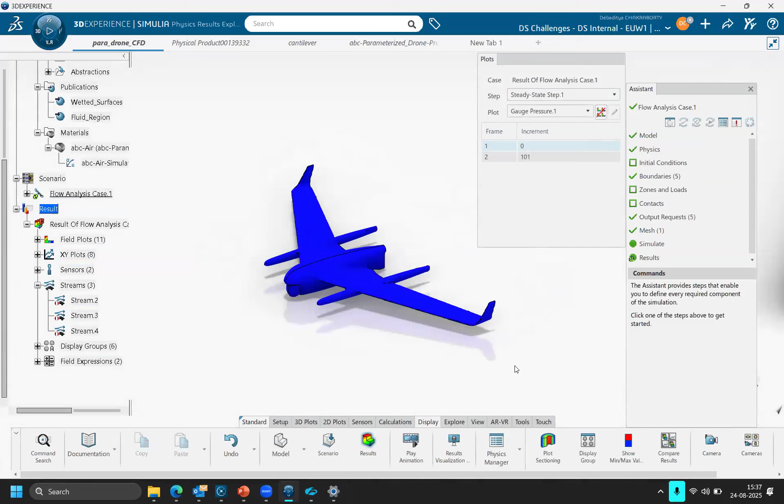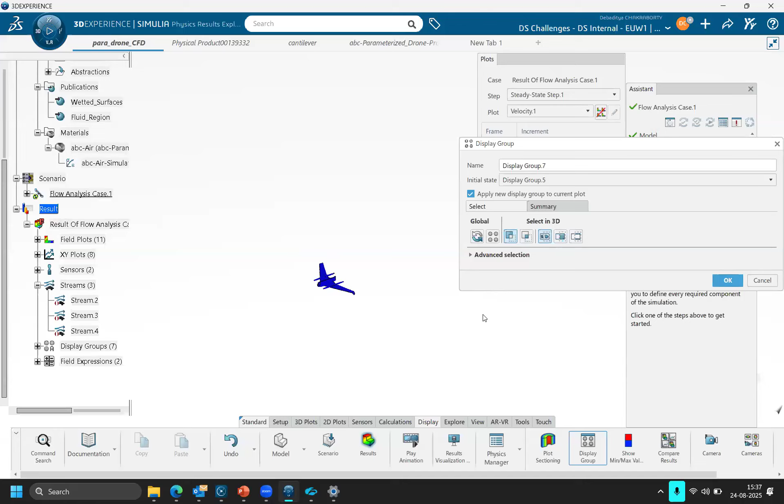Okay, so let's start with the display group. So velocity. We have a remove tool selected here. So here, since our drone is not moving, but rather the fluid is moving over it, you can see the velocity comes out to be 0. Let's go to view and put it the way it was.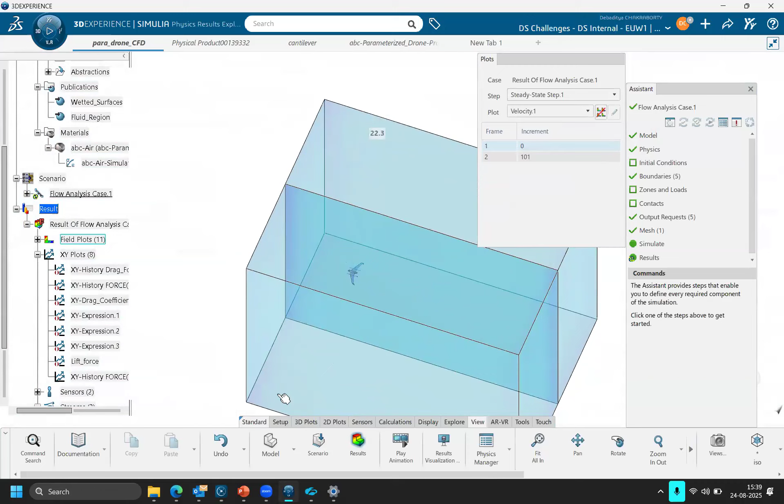Now let's align to an axis. Yeah, I think this is the right orientation. Here you can hover your mouse over to check the velocity. So again, this is the 0 increment. As you move to the last increment, then I actually zoom in and scope for all the values around the model.

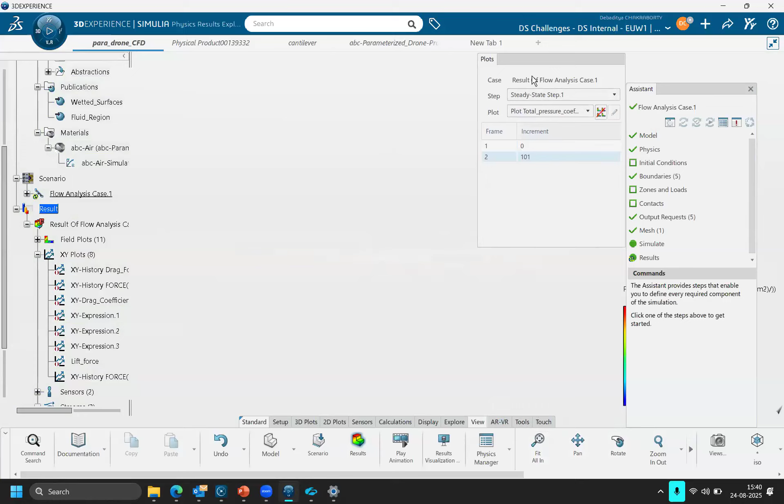Shubham, the results are loading. You can see a pop-up here. So meanwhile, do we have more questions? No, not any questions. But there is one, but it's fine for us.

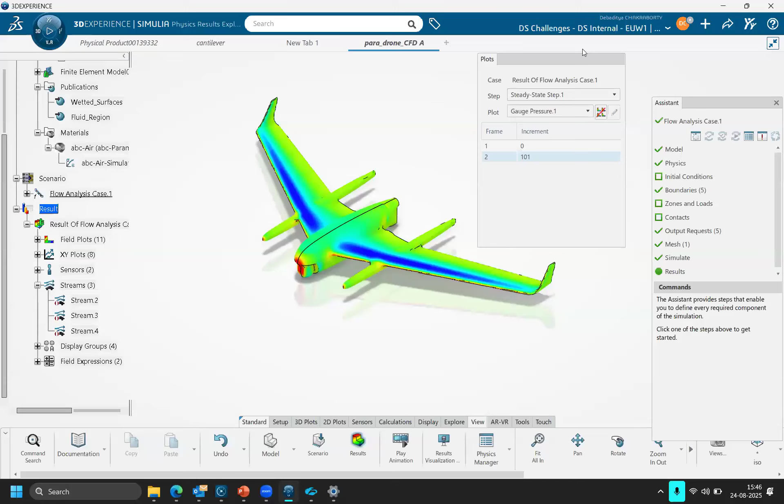So all the results we asked for in the outputs, we have them ready here. You'll automatically get a plots dialog box, so you could drop down here through all the options that are available. Let's start with velocity. As I mentioned earlier, the drone is not actually moving, the fluid flow is moving relative to the drone, so of course the drone will have zero velocity.

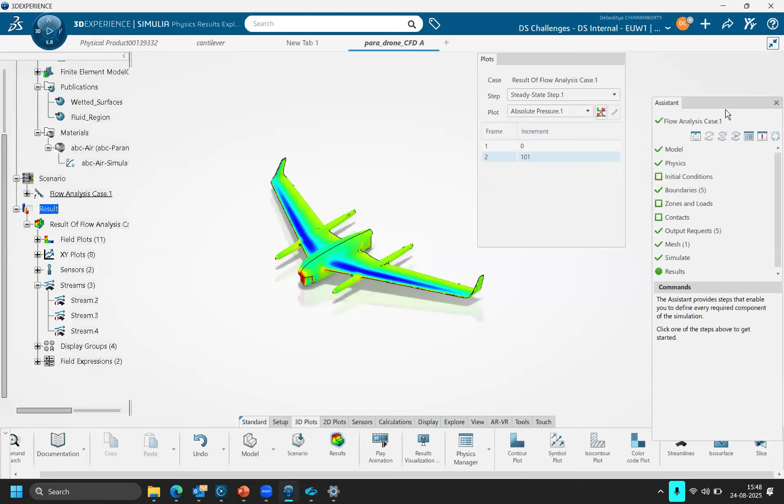Then you can also scope for the velocity vector of the fluid flowing over the drone. You can compute the absolute gauge pressure as well. Now if you want streamlines flowing over the drone, for that you can go to the action bar and select streamlines.

You can define the refinement, so either from here you can just click on plus. You'll see all the starting points have increased. You can actually see the streamline. So for a better view, I'll zoom in.

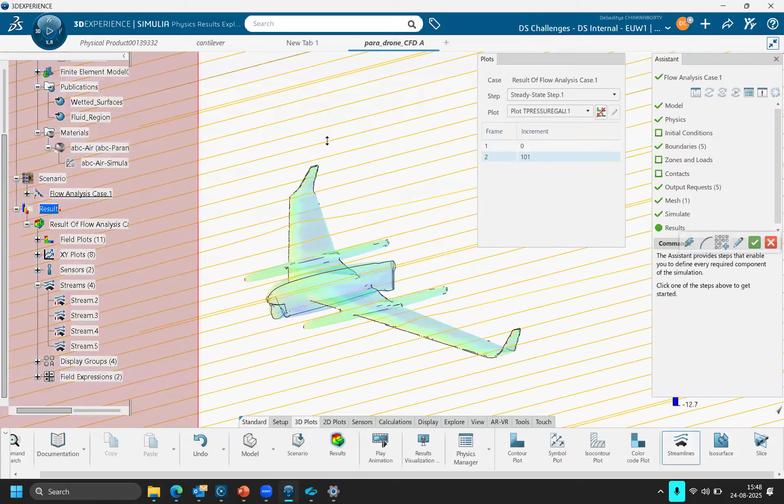Now if you want advanced actions, you can change the appearance from line to even arrows. Click on apply to visualize. You can increase the seeds here, let's say I'll go for 20. You can see a much more dense streamline that is flowing over the drone.

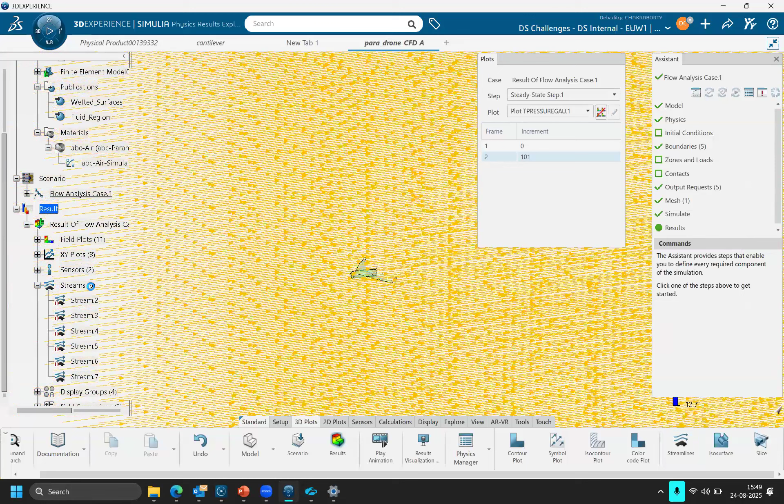And again, you can get much closer to the action if you configure the streamlines like so. Now let's see how you can do that. I'll deactivate stream 7 here.

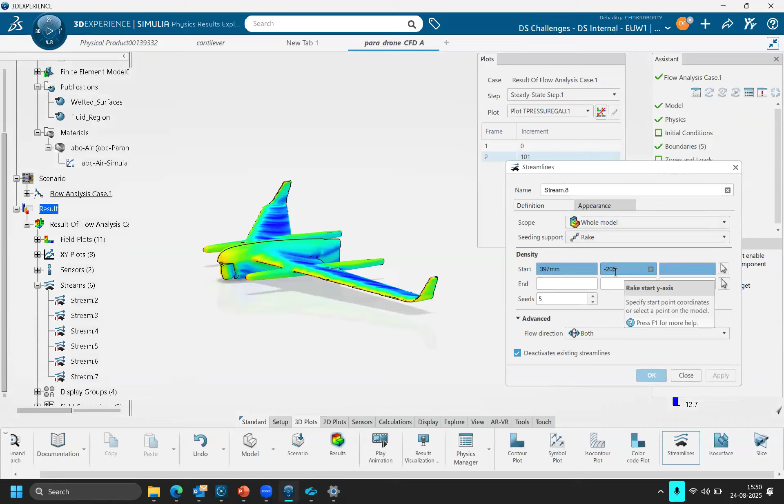Now from this drop down, seeding support, I'll select rake. Now you can see the dialog, an expansion of this box has come in. So here you can maybe put some value, I already calculated them before. Take a very dense seeding of 50 and let's change the flow direction to down.

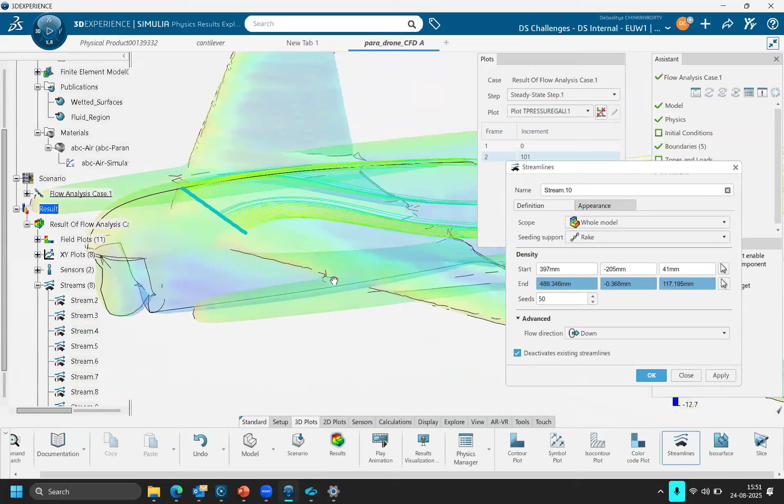Now you can go ahead and select the starting and end point, so you will get the flow only over your places of interest. Now if you want only the wingtips, let's say, the start and end point can be changed. Here for the start point, here for the end point, you can check for the wingtip vortices. Just back here.

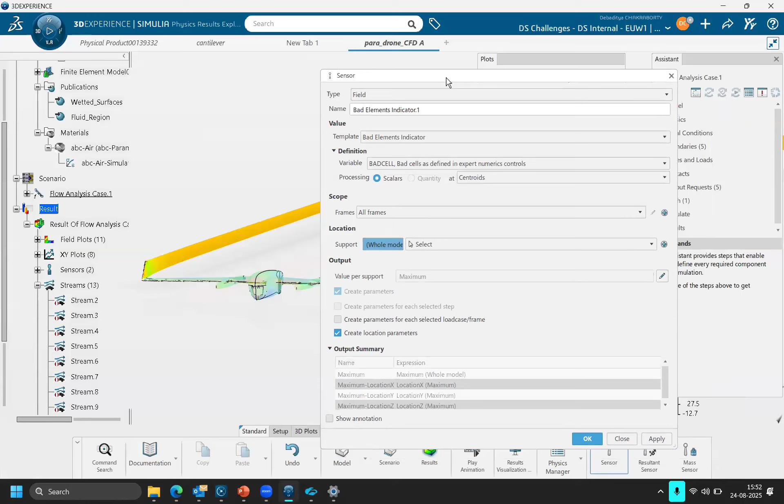Now let's check what sensors we can use to scope different output requests that we requested earlier during pre-processing. So if I toggle to history, select force, I'll select vector component 1, which is basically through the X axis. And from value per support, I'll select last. And for support,

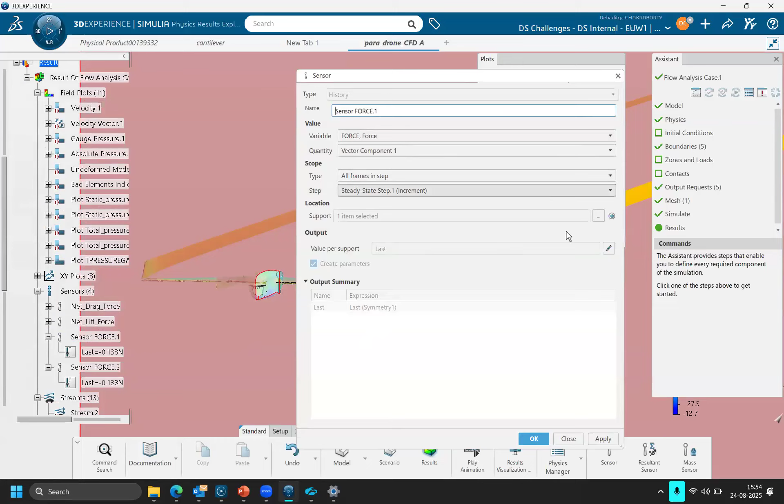can now access the sensor. So the sensor says, this is a vector basically, so minus 0.138 Newton was the drag force. And now you can scope for each, and I'm sorry, that was not the drag force. So basically the force in the X direction, not actually the drag force.

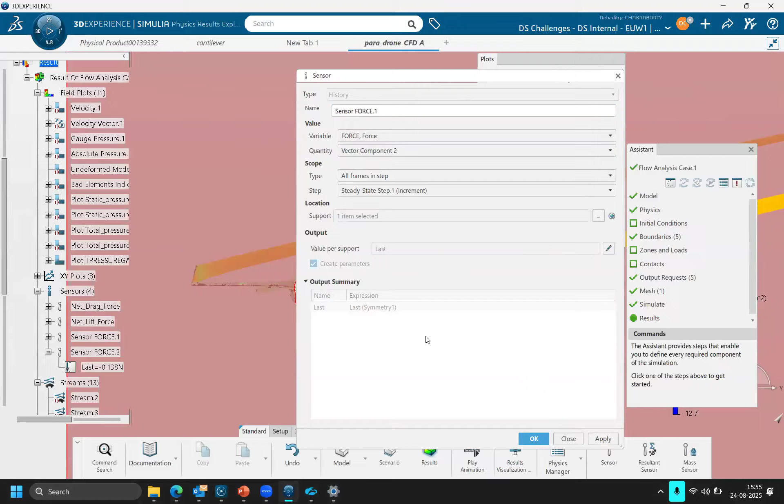So you can toggle around with different components and you can check the forces, like so. Yeah, so this is along the x-axis, so this will be the net drag force, that is around 328.5 newtons.

And yes, that is about it, Shubham, from my side.

That was all very right, cool Debaditya. So there are a couple of questions. The first one is from Abhijit. He's asking, can we use 3DEXPERIENCE as a platform for multi-physics problems? What kind of multi-physics problems? I think Abhijit, you can post in the Q&A by elaborating more.

Until then, there is another one. Sir, please, is it possible to simulate the same model, but this time making the drone move with a particular velocity relative to the fluid motion? You want the model to move? Yes, I think that's what he's asking. That will be computationally very expensive, and usually you don't do such analysis with moving body parts. Otherwise, if you are using moving models, then I think rather than Navier-Stokes, you should go for a lattice-Boltzmann based solver.